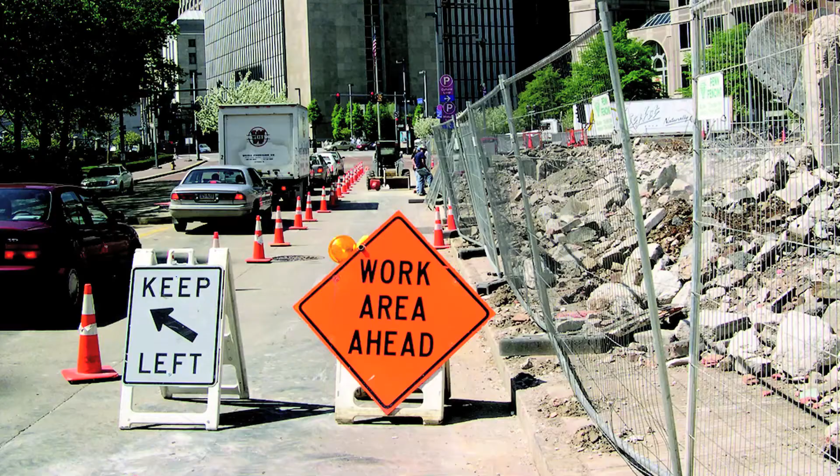Safety of the public includes pedestrians and vehicular traffic. Particular conditions on a job site may require additional signage, such as this one. Emergency egress plans are developed for each floor of every job site.

Every job site has an adequately supplied first aid kit, and some even have automated external defibrillators. Superintendents and foremen are all first aid CPR certified. Smoking is not permitted inside our buildings or job offices. All job sites have all applicable posters on display for everyone to reference.

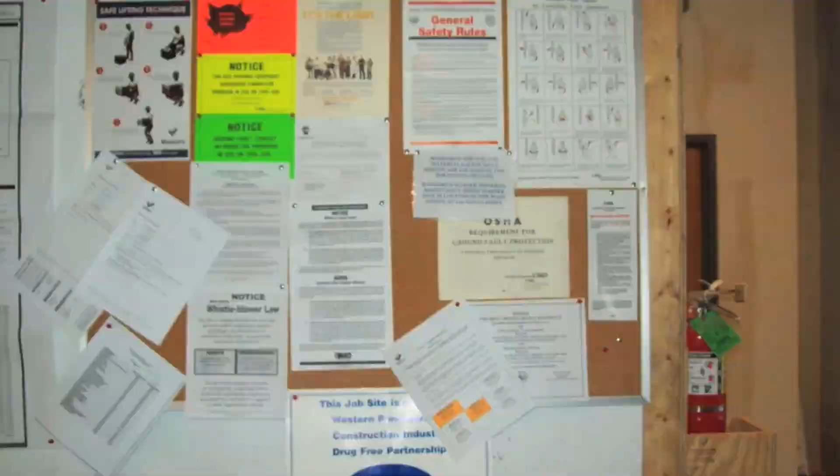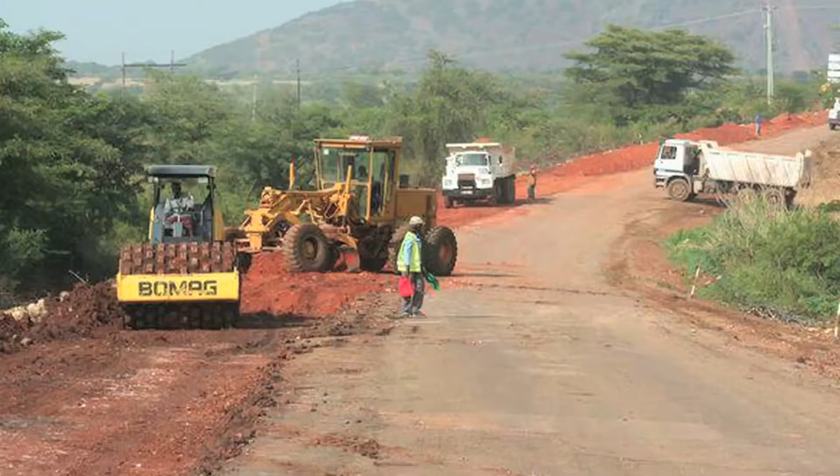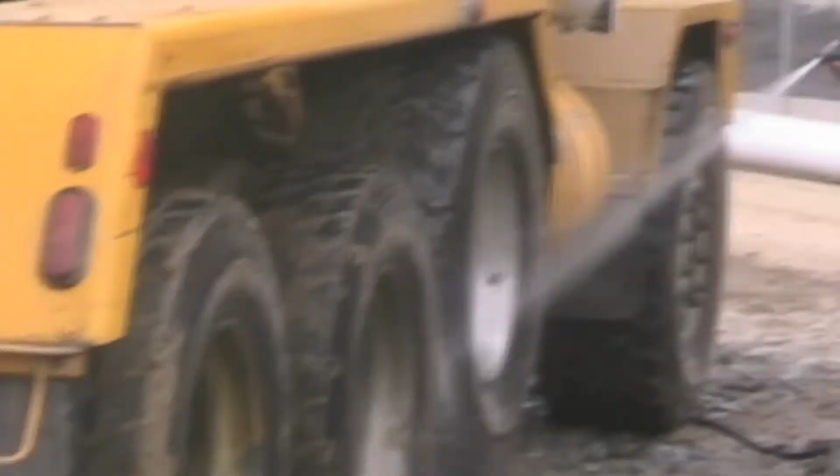Neither drugs nor alcohol are permitted on any job site. Job sites are laid out to allow for clear vehicle and equipment travel. Materials are neatly stacked and stored. Perimeters are adequately lit for the safety of pedestrians. Tire washing is vital in keeping public roads clean.

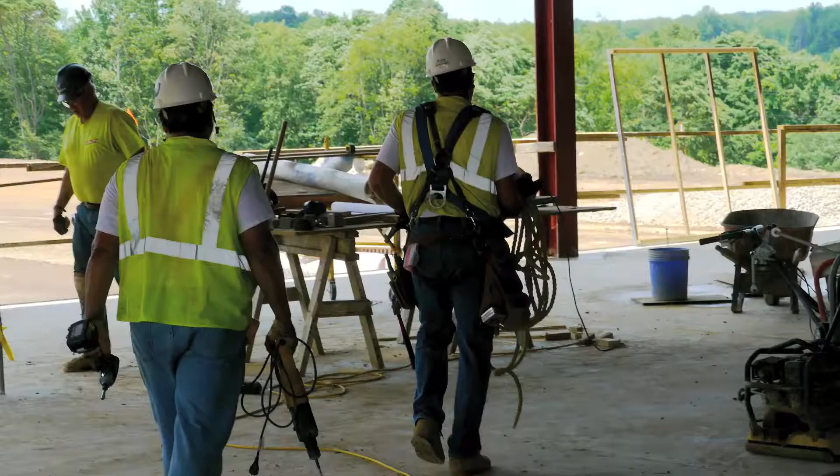Proper job site attire includes long pants, shirts with sleeves over the shoulders, work boots, and hard hats at a minimum. High visibility attire is recommended on all Mascaro job sites. High visibility attire is required on any job site where there is moving equipment, machinery, or vehicular traffic. Hearing protection is available on every job site.

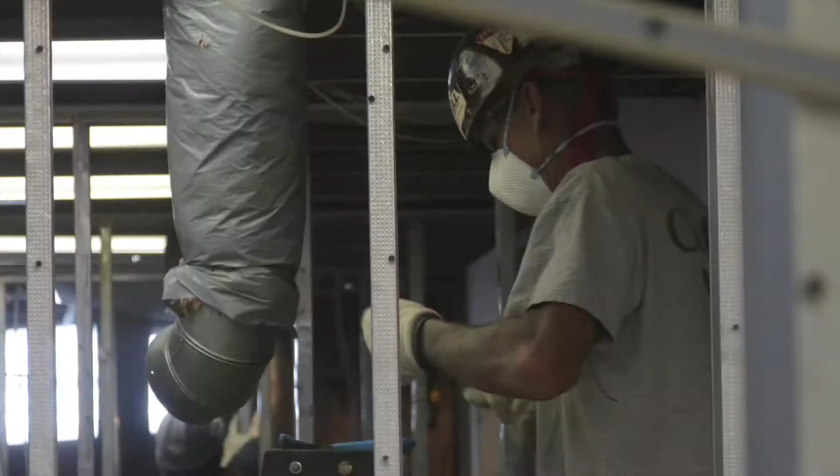Filtering face piece respirators like the N95 protect against nuisance dust and can be worn by anyone on a voluntary basis. Half-face respirators can only be worn by employees who have been fit tested and undergone a health evaluation. Respirators must be kept clean and carefully stored.

PA One Call must be called before any digging begins. All excavations must be inspected before anyone enters and barricaded. Excavations are accessed by an extension ladder. Every excavation 5 feet and greater must be benched, sloped, or shored with a trench box.

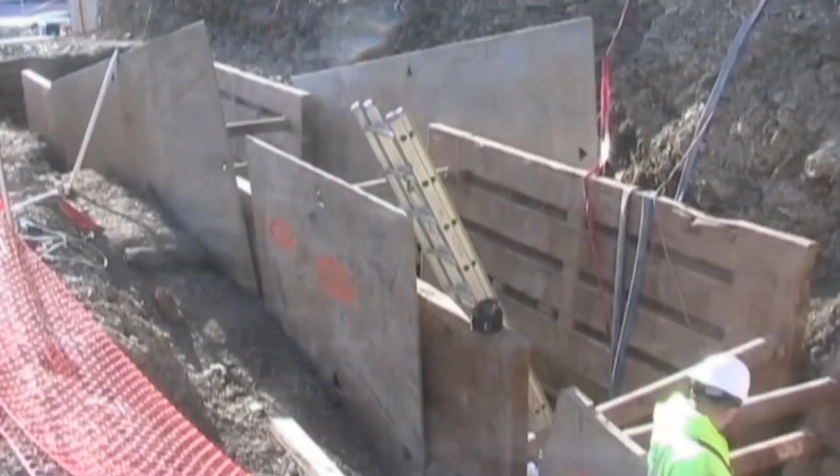Boxes must extend above the top of the excavation. Workers must always be inside the box. Spoil piles need to be 2 feet back from the edge, and equipment should never travel near the edge of an excavation. Ensure all utilities are marked.

Fall protection is very important. Anyone exposed to a fall 6 feet or greater will be protected. The body harness is the main piece of personal protective equipment used in fall protection. Every worker must inspect their harness before each use.

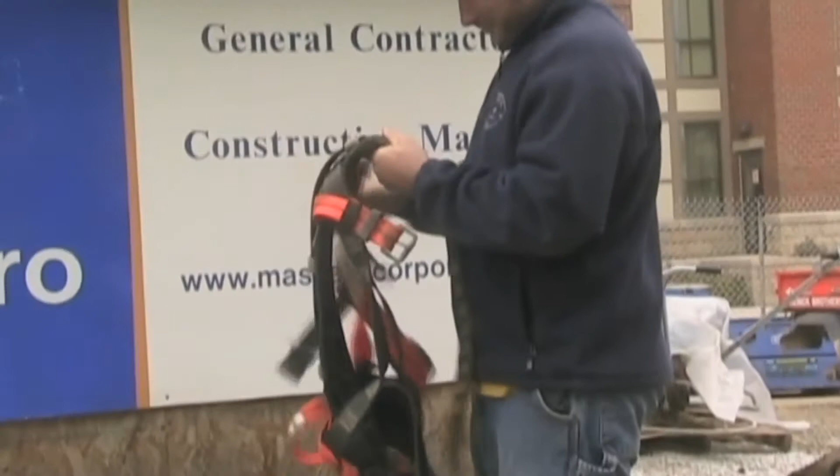Labels must be legible. There should be no tears, frays, discoloration, or alterations made to the harness. The harness must be worn properly. The D-ring is in the middle of the back, the chest strap in line across the chest, and leg straps should be snug. Any harness involved in a fall will be removed from service immediately. Ensure the harness is the right size and weight capacity for the worker and his or her tools.

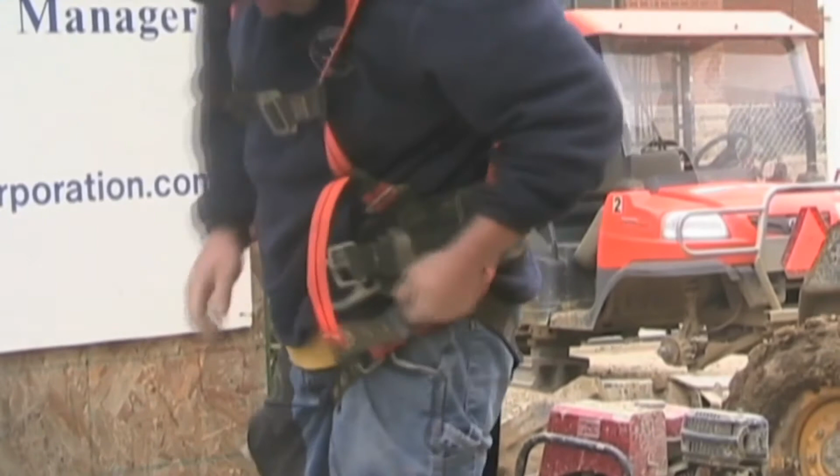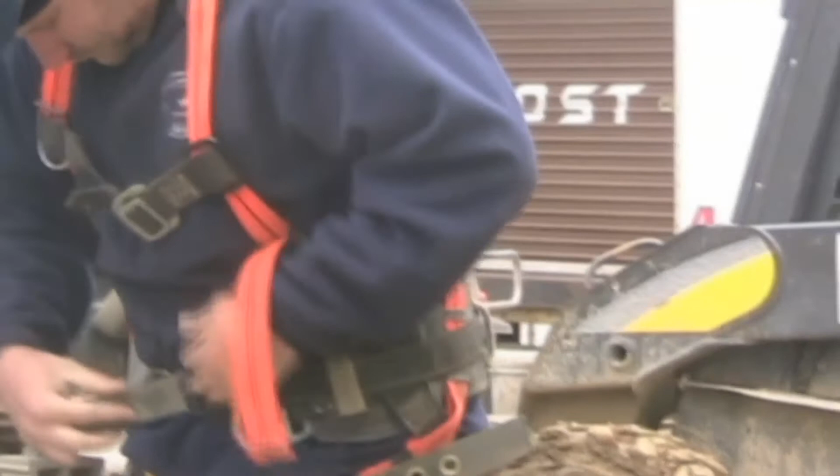Other components of personal fall protection should also be inspected thoroughly. These include lanyards, rope lifelines, and retractables. Ensure your anchorage point is adequate. Only one worker can be tied to an anchorage point at one time. Never use a retractable and a lanyard together at the same time. Also, ensure you are using the proper fall protection device for the height at which you are working.

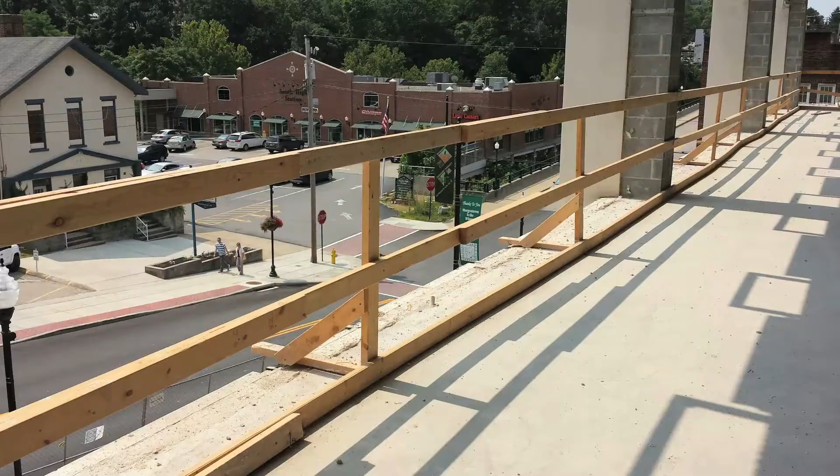Guardrails are a very common means of fall protection for leading edges, shaft openings, and window openings. Guardrails can be wood or cable. The top rail is to be at 42 inches and the mid rail at 21 inches, plus or minus 3 inches. Cable will be flagged to ensure visibility with stanchions 8 feet apart.

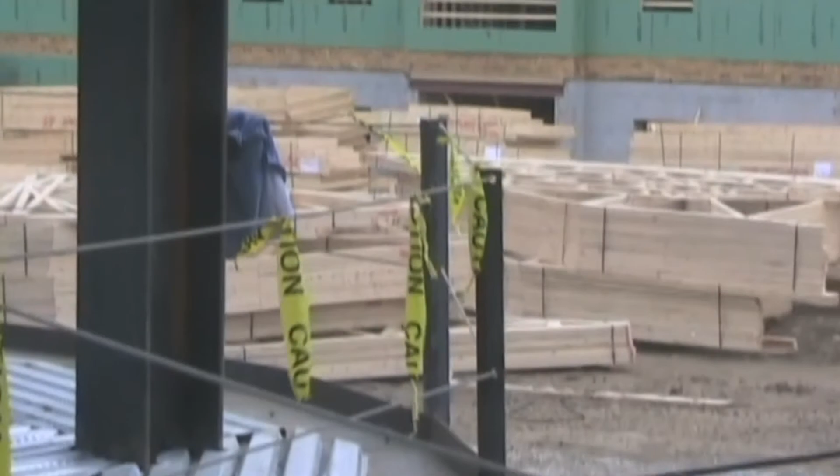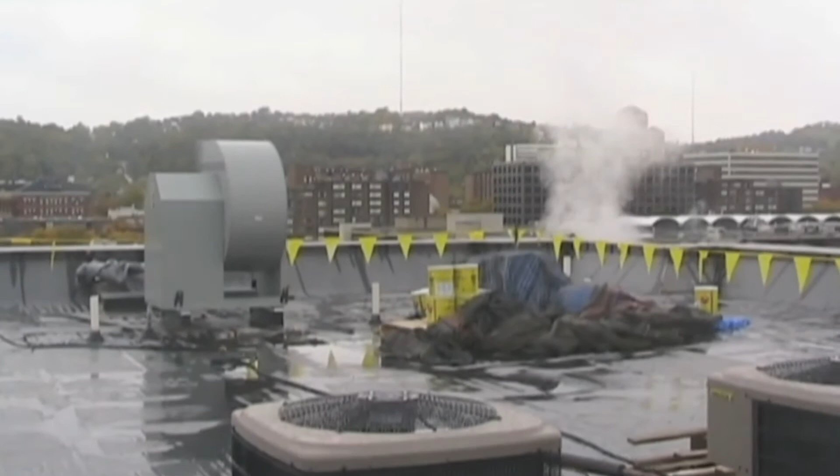When a roof parapet is below 39 inches, flagging will be used. Working beyond the flagging requires additional fall protection measures like a harness or safety monitor as a last resort. Fall protection shown here includes roof brackets, retractables, and rope lifelines.

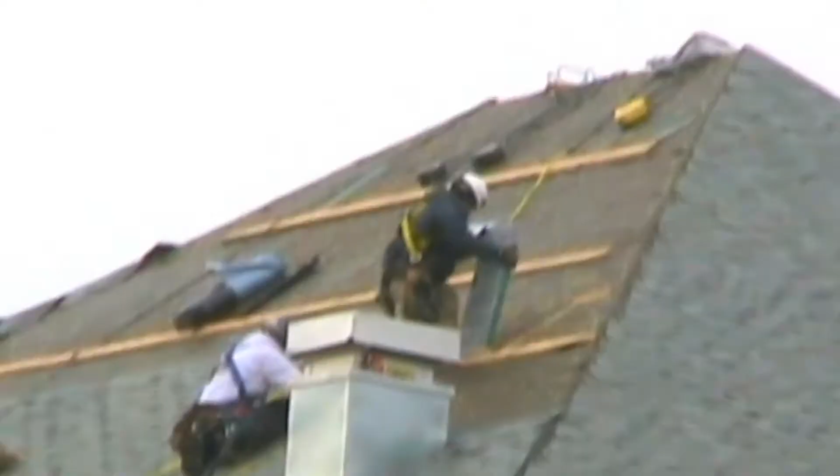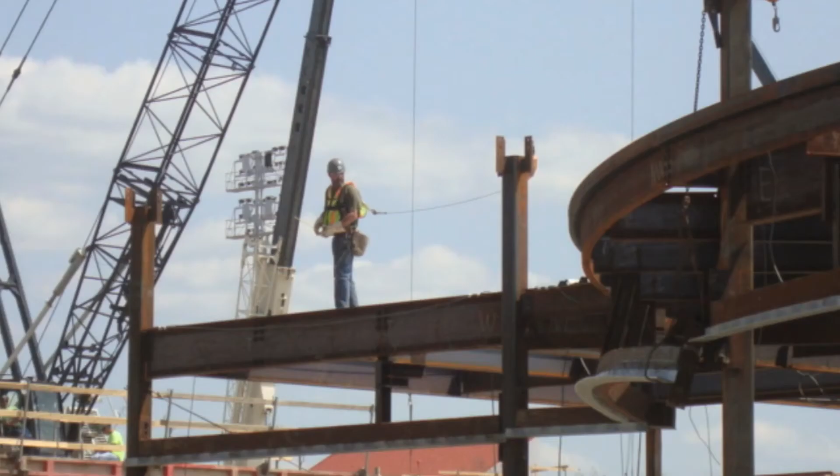It is important to have your anchorage point above your D-ring. If an overhead anchorage point is not available, it is acceptable to tie off below your D-ring. When using retractables, watch how far they are extended to avoid swinging in the event of a fall. Horizontal lifelines, like the one shown in this picture, must be engineered. When welding, employees will wear welding hoods and gloves.

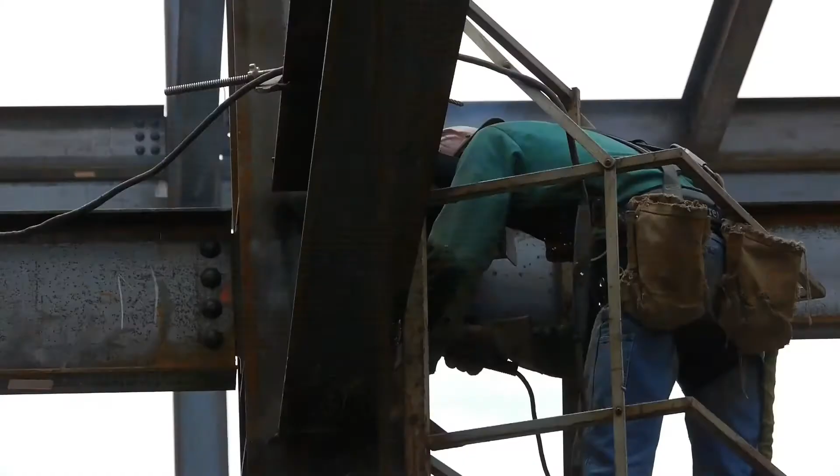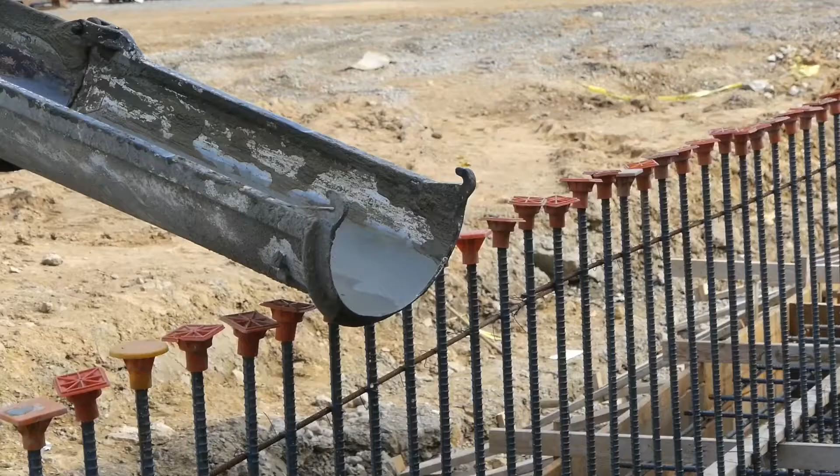Screens such as this are helpful to protect other employees from welding flash. When working with concrete, long sleeves and gloves are recommended. Rubber boots will be provided. A hand washing station is also available, and workers should use care to not get concrete on their skin. Always use caution when backing up trucks and ensure backup alarms are audible.

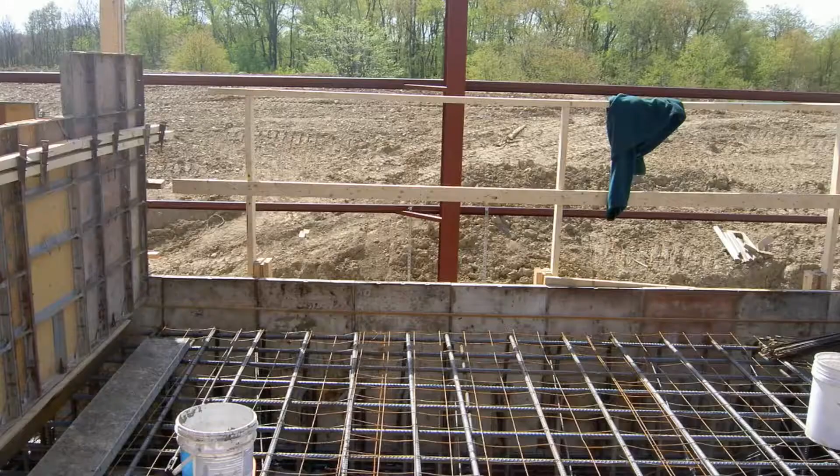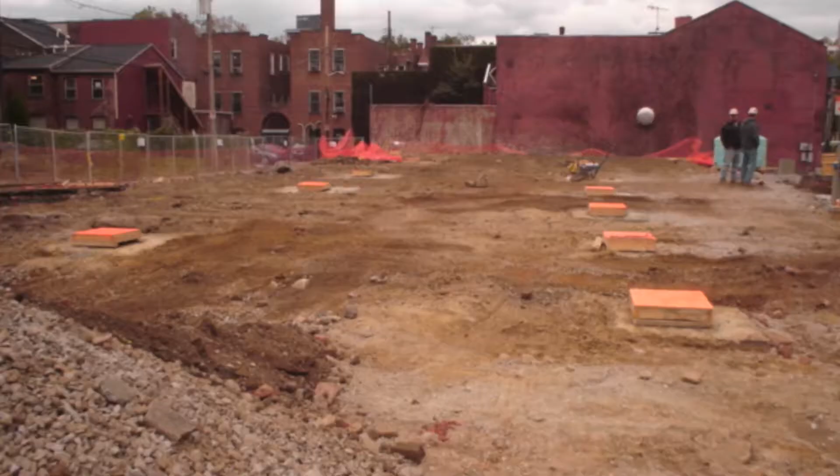Concrete pour perimeters are protected prior to the concrete pour, so fall protection is readily in place. Rebar is capped as shown in this picture to protect workers from possible impalement injury. Anchor bolts are also protected as shown in this picture.

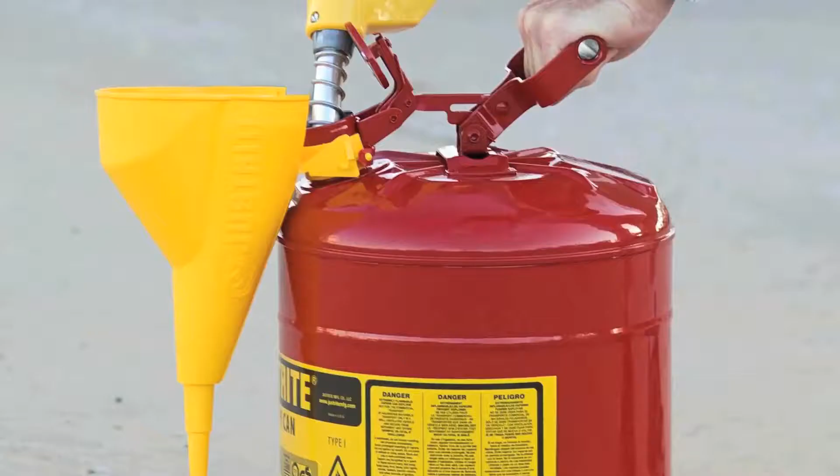Every job site has fully charged and currently inspected fire extinguishers. They can be mounted on the walls or visibly located in hallways or stairwells. All gas cans have self-closing safety lids. Gas is kept in red cans, diesel in yellow, and kerosene in blue.

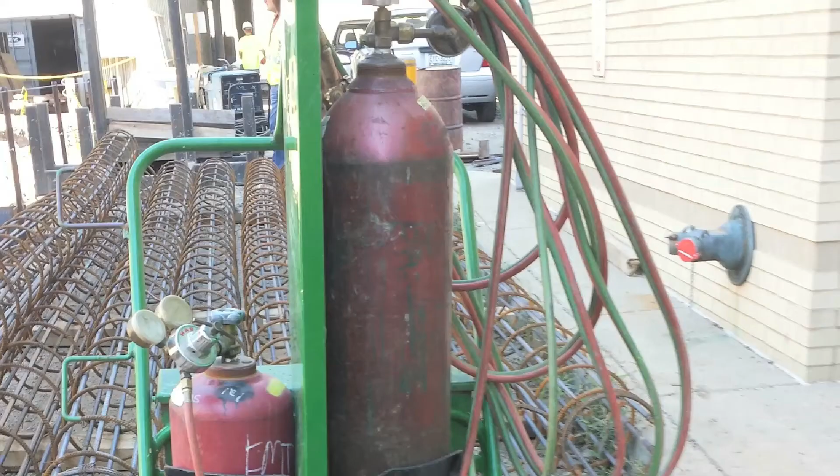All cylinders are kept in an upright position and secured at all times. Fire extinguishers are in close proximity. Cylinders must be capped when not in use. Oxygen and fuel gas cylinders must be separated by 20 feet or by a 5-foot-high, half-hour rated divider. All cylinders in use must have properly working gauges with the covers in place.

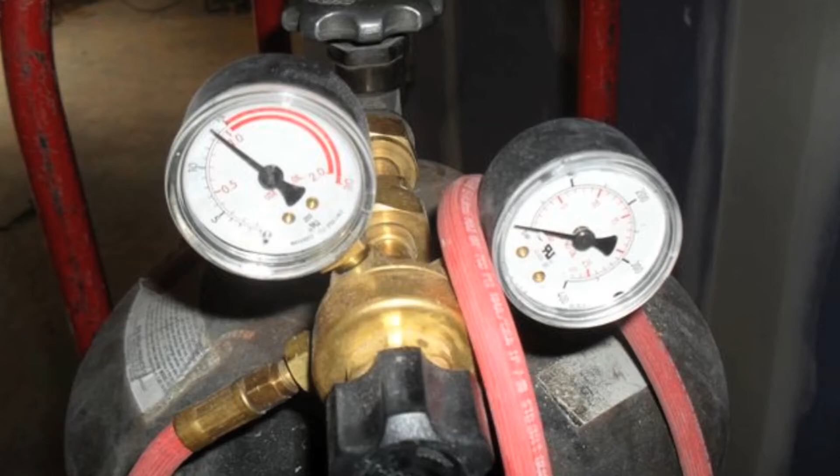Fuel tanks are properly labeled and kept in containment pans to protect against damage and contain any leaks or spills. A charged, currently labeled fire extinguisher must be between 25 and 75 feet of all fuel tanks.

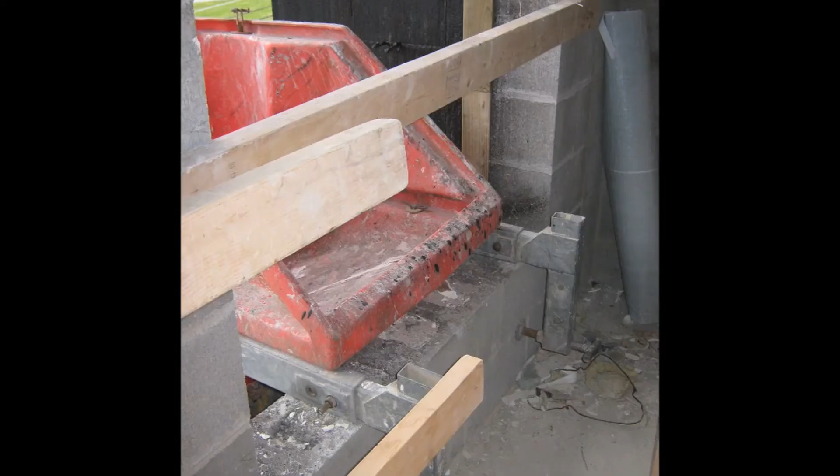When performing demolition, the area is always barricaded and water is used to control the dust. Ensure equipment is in good operating condition and all employees are in sight of the operator. Trash chutes are found on multi-story buildings. The openings are always barricaded.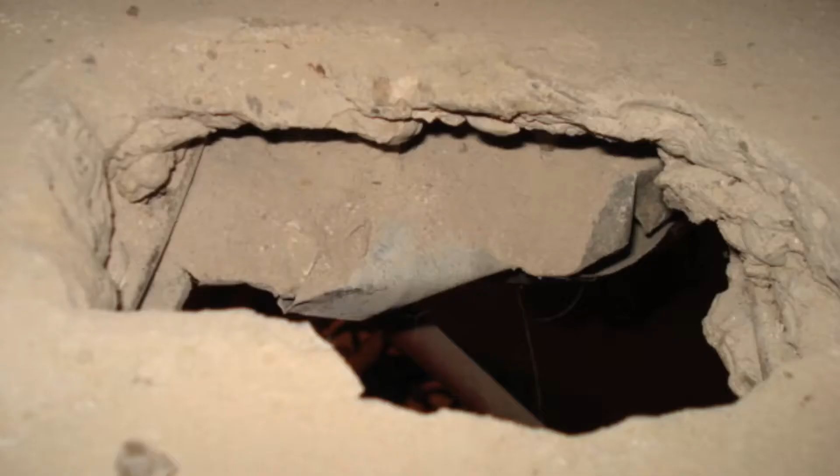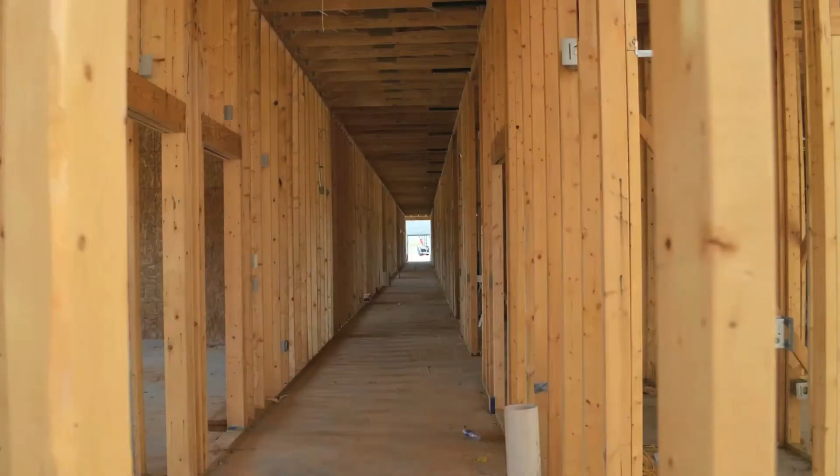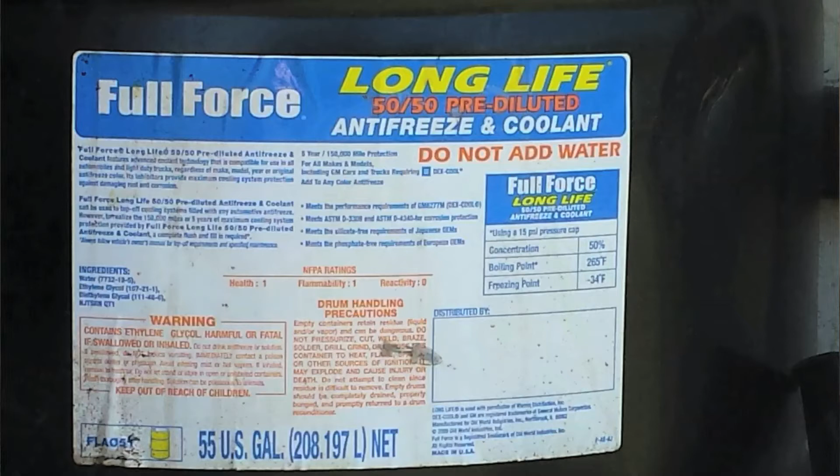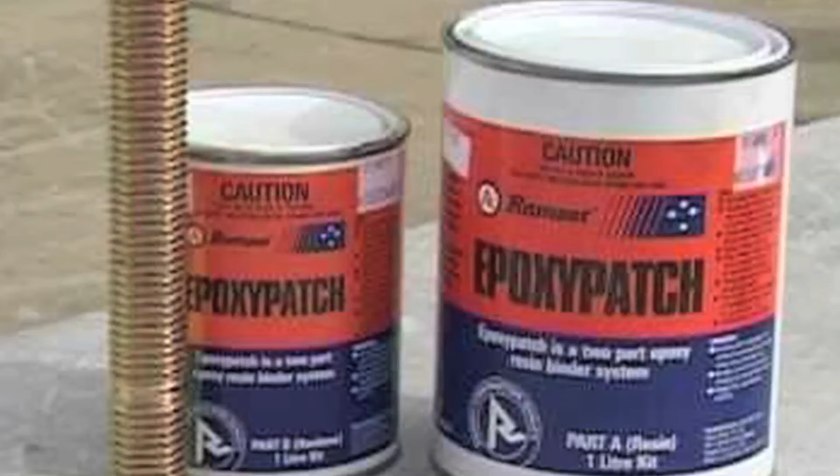All products and materials are properly labeled, and the label must be legible. Each job site contains a chemical inventory sheet and the proper material safety data sheets for every chemical on the job site. Material safety data sheets describe the material and all associated health hazards and PPE that may be needed to work with the material.

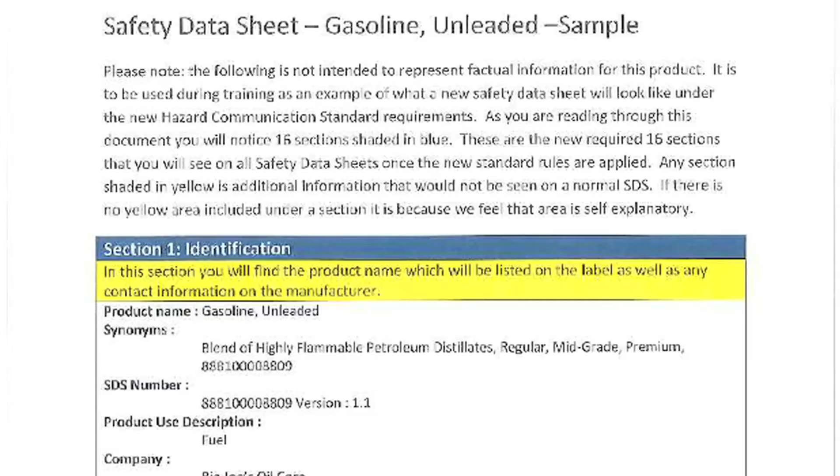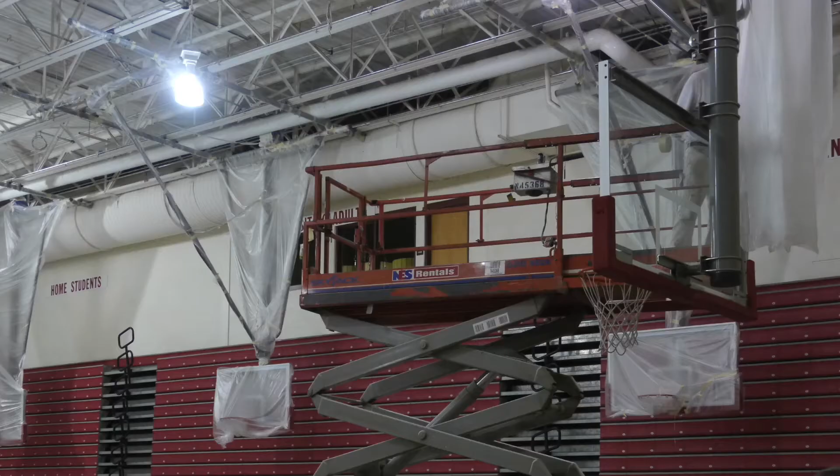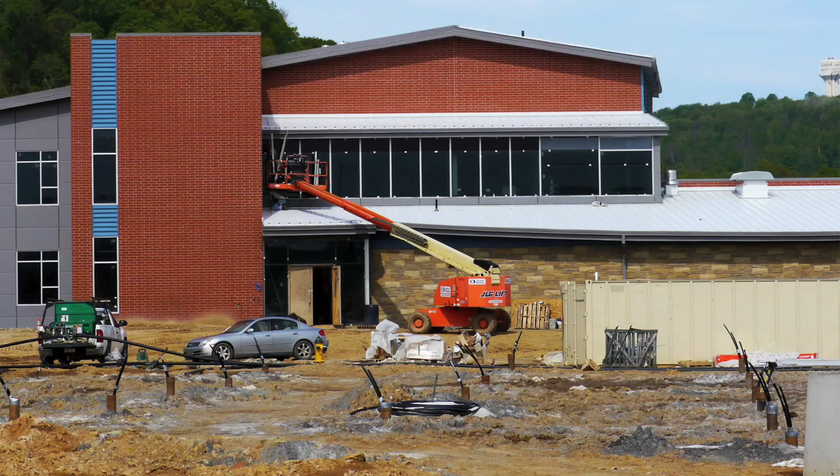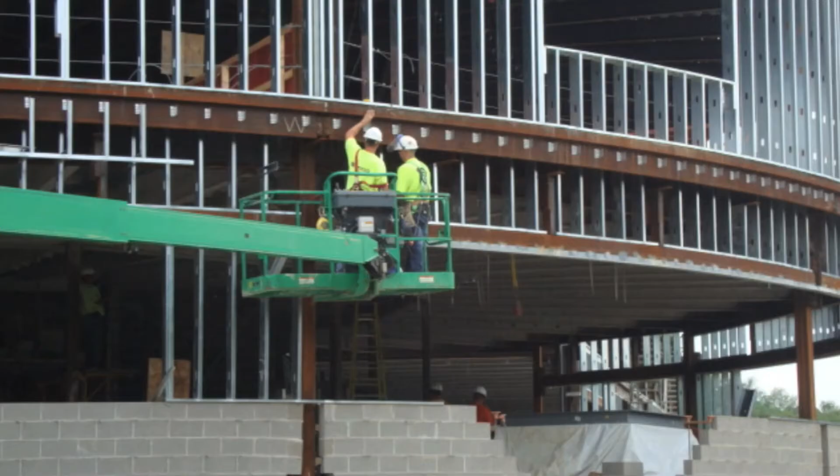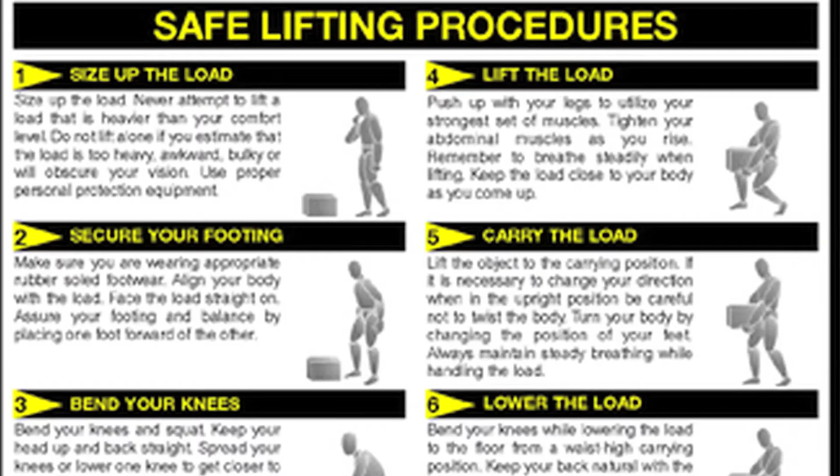Another type of lift found on our job sites is a swing arm lift, as shown here. Workers must also stand on the deck of the lift. Guardrails must be in place. In addition, the worker must also be tied off to the inside of the basket at all times. Safe lifting is encouraged on every job site to ensure the health of each worker. Wheelbarrows and carts are available on all job sites to move materials.

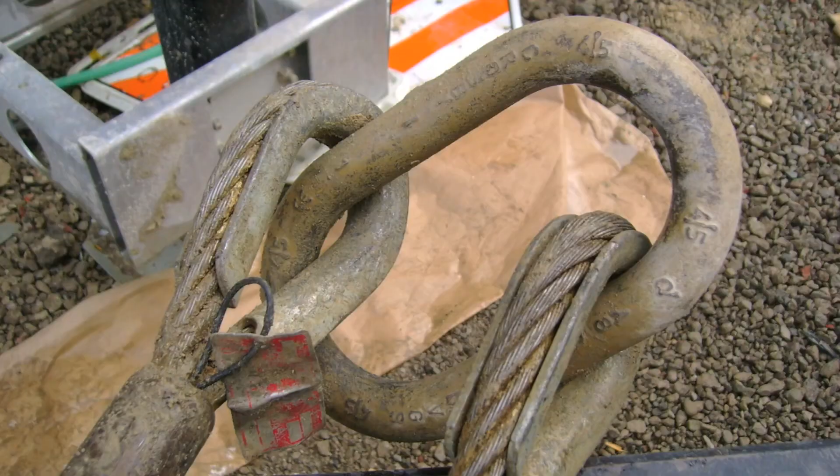Slings are commonly used for hoisting material. If a sling is frayed, torn, discolored, or damaged in any way, it must be removed from service. A key indicator of damage is when the colored thread is showing. Wire chokers must have tags. Ensure the wire is not bird caged and there aren't a number of broken strands of wire in the choker. Also ensure that every sling or choker is the proper weight capacity for the material being hoisted.

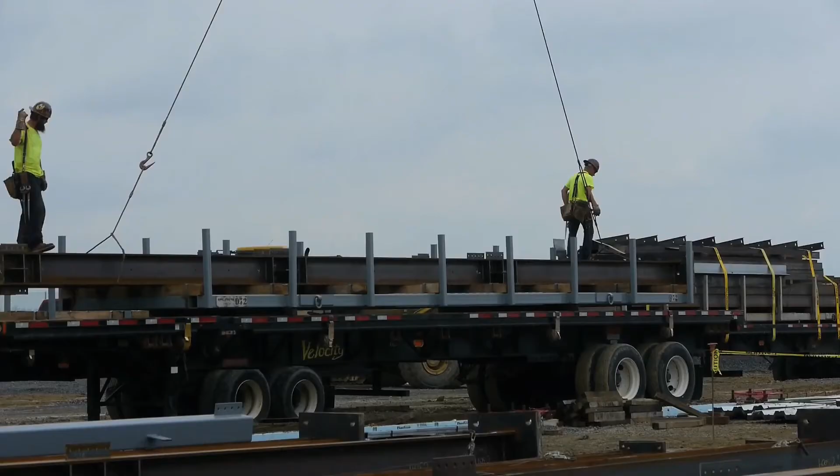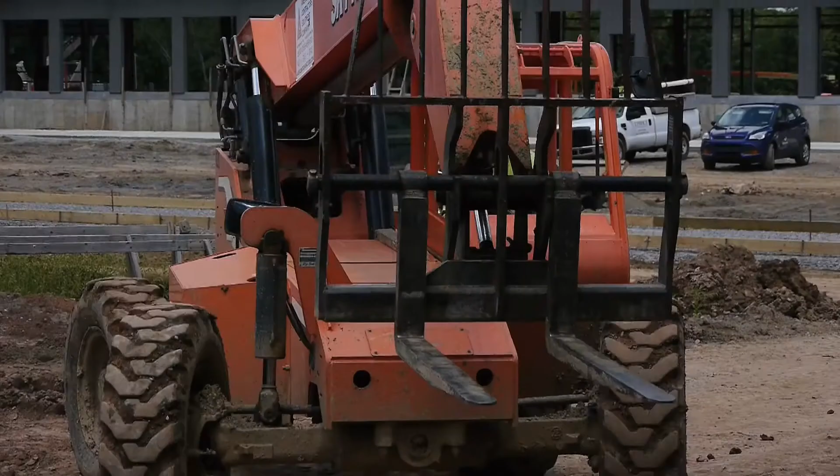Crosby clamps must be properly applied with the belly of the clamp on the live end of the rope. When maneuvering bulky loads, more than one employee should assist and taglines should be used. When hoisting more than one item at a time, ensure they are properly rigged. An all-terrain forklift is commonly used for material handling. The operator must be certified and wear their seatbelt at all times. The backup alarm must be audible.

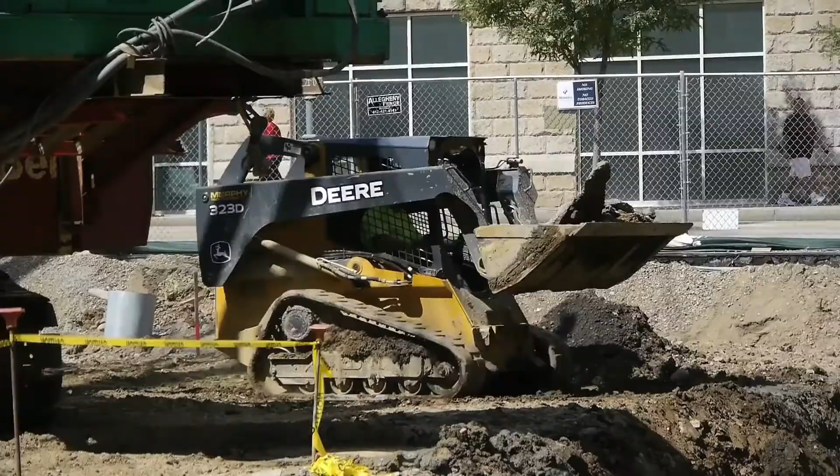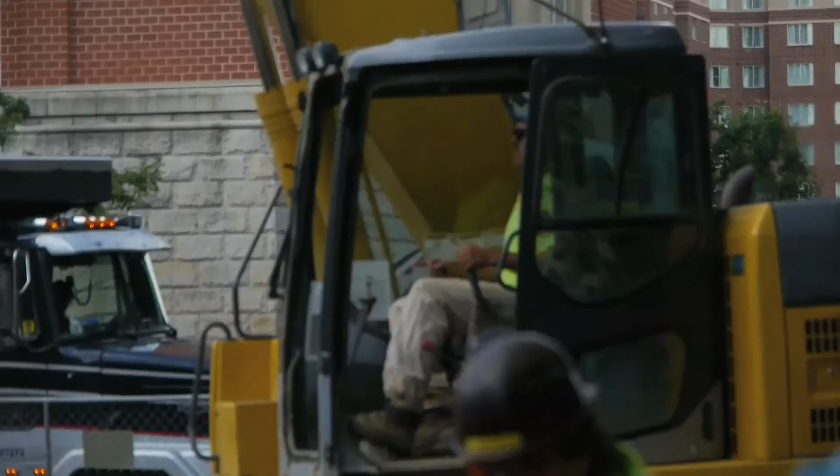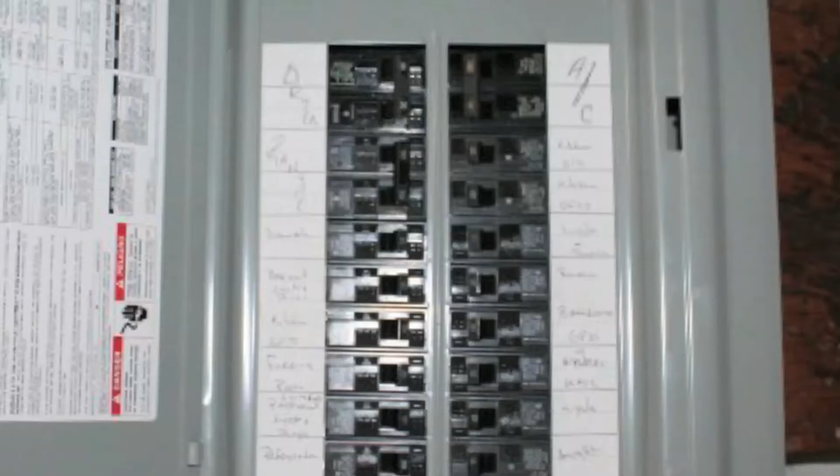All heavy equipment must be in good operating condition. This includes not leaking any fluids, having an audible backup alarm, windshields free from cracks, and competent operators. Electricity is provided and maintained by the electrical contractor on the job site. All panel boxes must be securely closed and have no openings anywhere on the box. All boxes must be properly labeled. Inside of the panel boxes, there must not be any openings either. If there are, blanks are to be used.

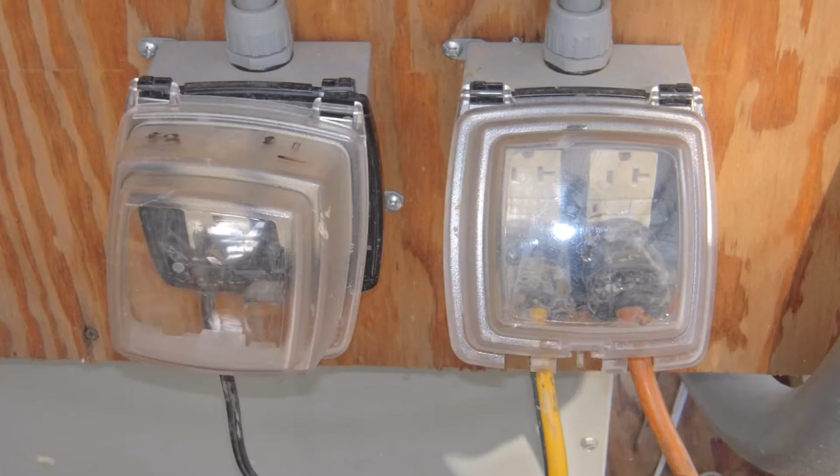Job site outlets are to have ground fault protection, as you can see here with the test reset button. Outdoor outlets must have covers on, as shown here, to protect from the weather. All extension cords must have a ground prong. If the job site is not wired with ground fault protection, a GFCI as shown here must be used. With permanent power, all outlets must have faceplates, then the GFCI, then the cord or tool.

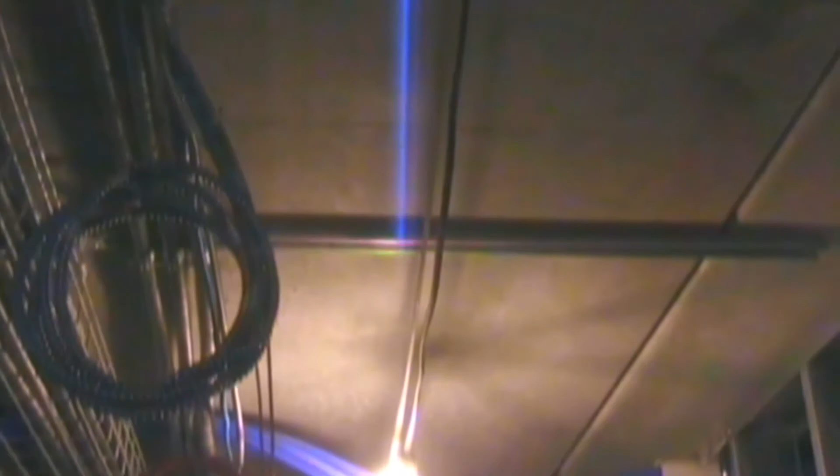Temporary lighting will be wired overhead as shown here by the electrician on the job site. All temporary bulbs will have cages to protect them from damage. Keep extension cords up off the ground to protect them from damage. Temporary light stands must also have protection in place to keep the bulb from being damaged.

It is very important to be aware of any overhead power lines near your job site. Make sure they are located, signage is in place, and always take them into consideration with heavy equipment, scaffolding, and even with the use of ladders.

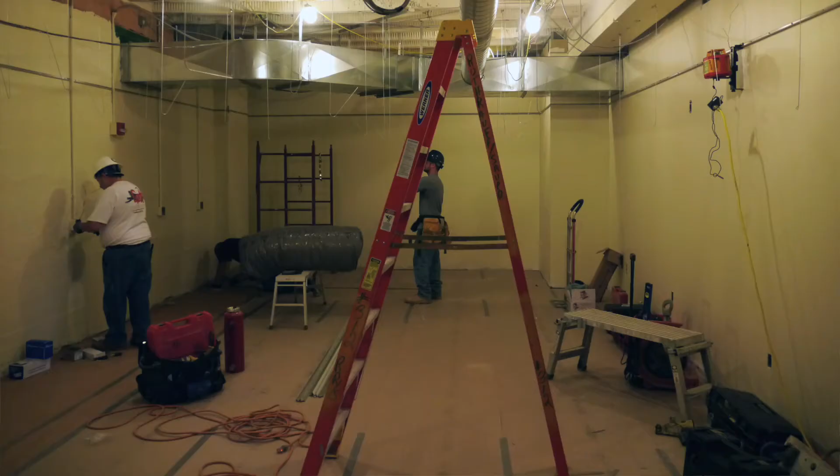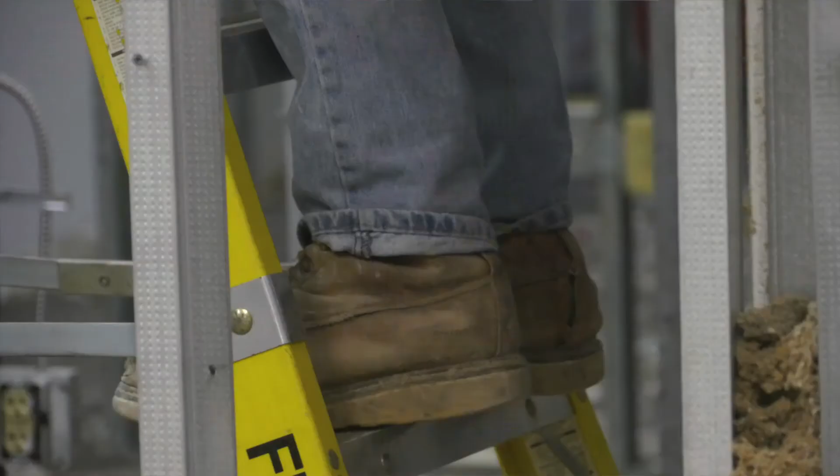Step ladders are to be used in the fully open position and on a level surface. Do not paint or alter the step ladder in any way. Never stand on the top or next to top step of a step ladder.

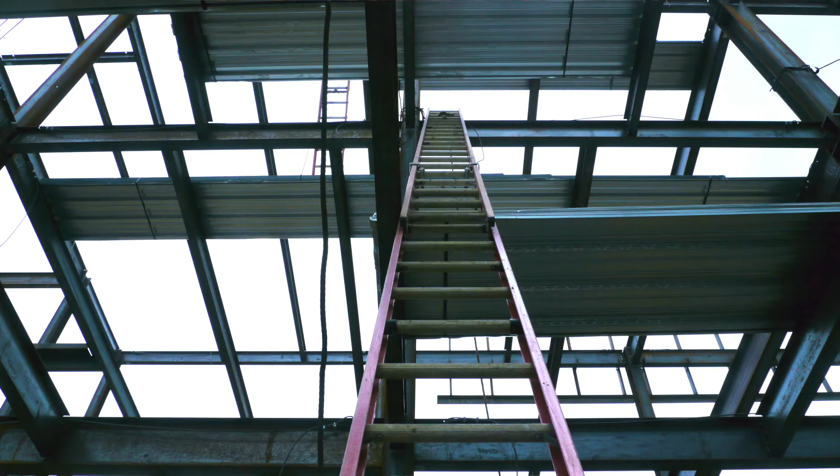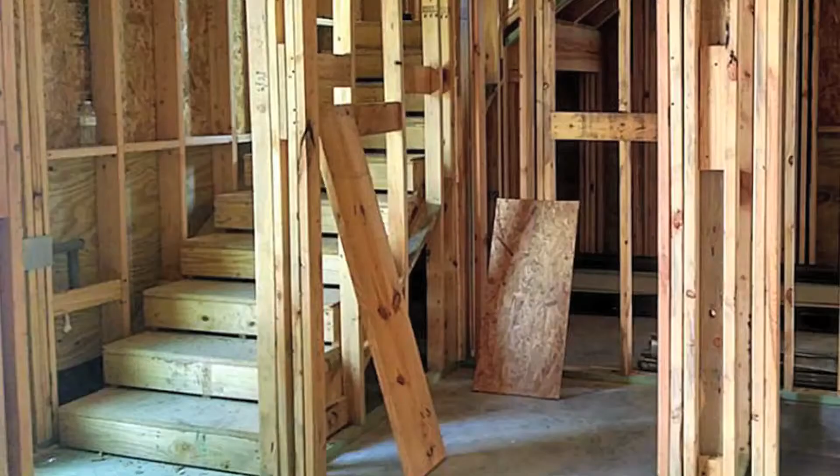Job-built extension ladders are very common on our sites. Notice the cleat at the bottom to keep the ladder from kicking out. Extension ladders must extend 3 feet beyond the platform and be secured at the top. Job site stairwells are kept clean and have handrails in place. Any break in elevation over 19 inches must have a ramp, steps, or ladders for access.

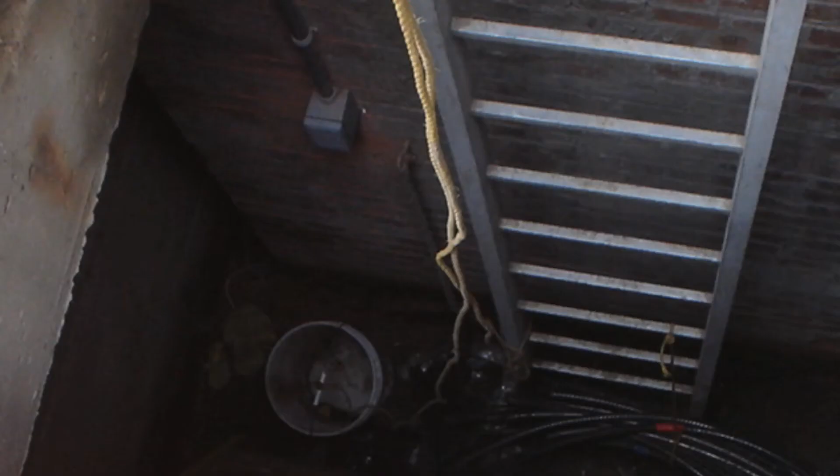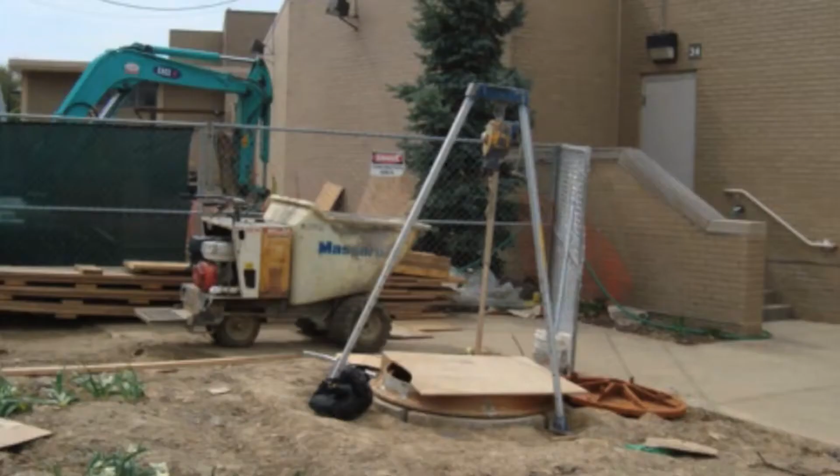A confined space is defined as having limited means for entry and exit, not designed for continuous occupancy, and poses the possibility for asphyxiation or entrapment. Before every entry into a confined space, the air is monitored as shown here. The confined space is properly covered when no one is working inside.

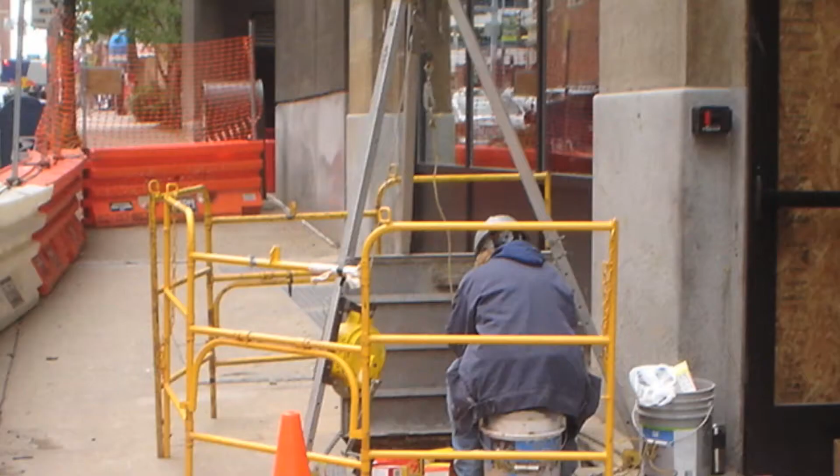A tripod is used for each worker in a confined space. The tripod is attached to the worker's harness and is required in case retrieval is necessary. A spotter is always outside the space when someone is inside. Notice the barricade around the confined space.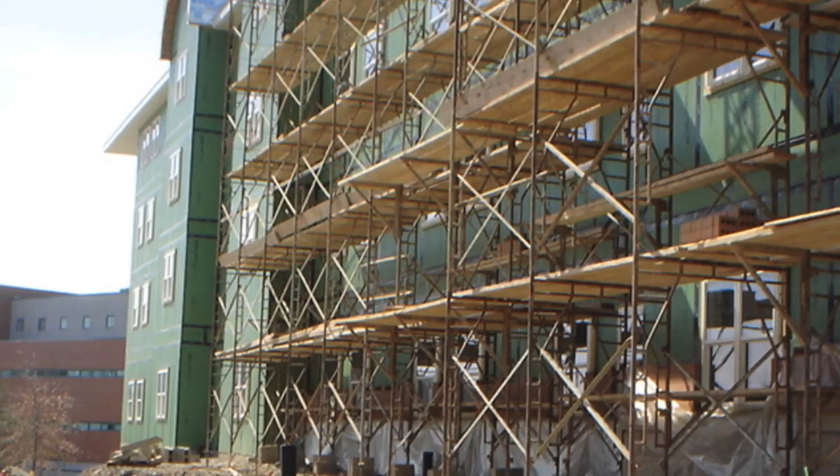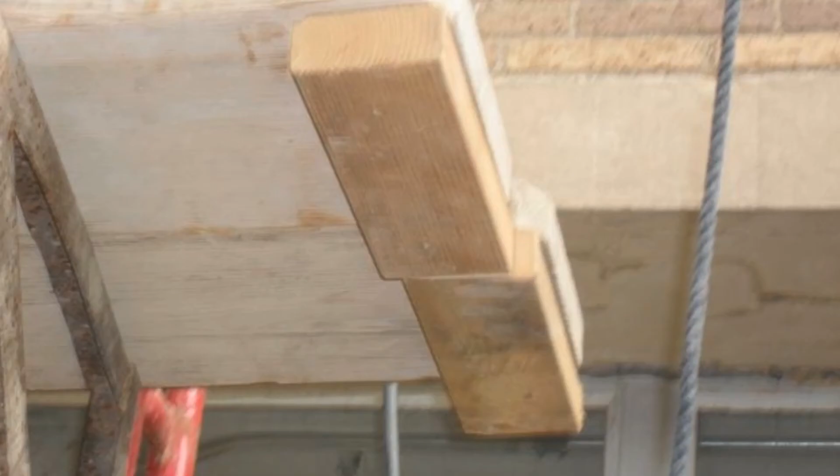Scaffolding is commonly used as an elevated work platform. Only competent scaffold erectors with a card can build and dismantle scaffold. Scaffold must be set up on a firm, solid surface. It is completely planked and railed with toe boards in the areas the workers are working. Multi-levels will have a stair tower. If scaffold planks do not extend far enough beyond the frame, cleats are used to prevent the plank from walking off the frame.

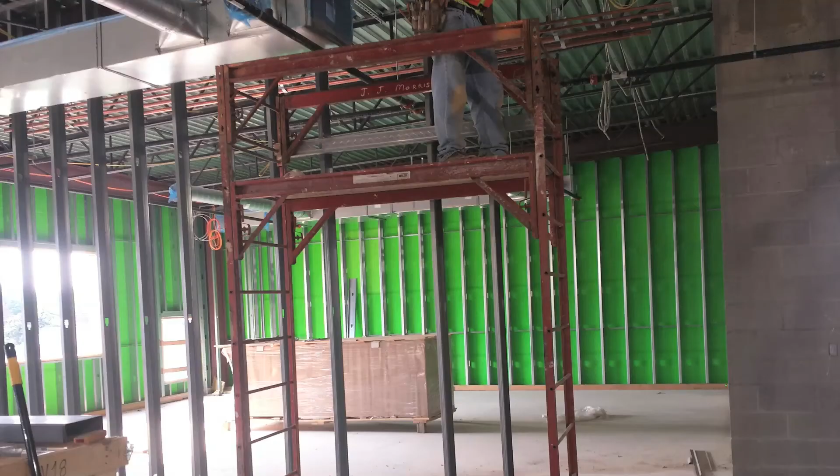Another form of scaffolding is a mobile scaffold as shown here. Mobile scaffolds must be used on a level surface with the wheels locked when people are on the scaffold. The work platform must be in good condition and solid. All scaffold over 6 feet needs rails for fall protection. Do not pull yourself along while standing on the mobile scaffold.

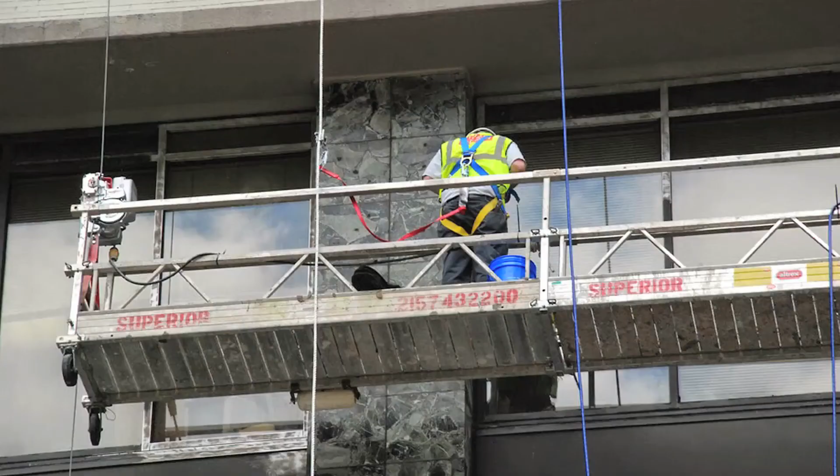When working on a suspension scaffold, the workers must be tied off at all times. Ensure the individual lifeline anchorage points are separate from the tiebacks of the scaffold itself.

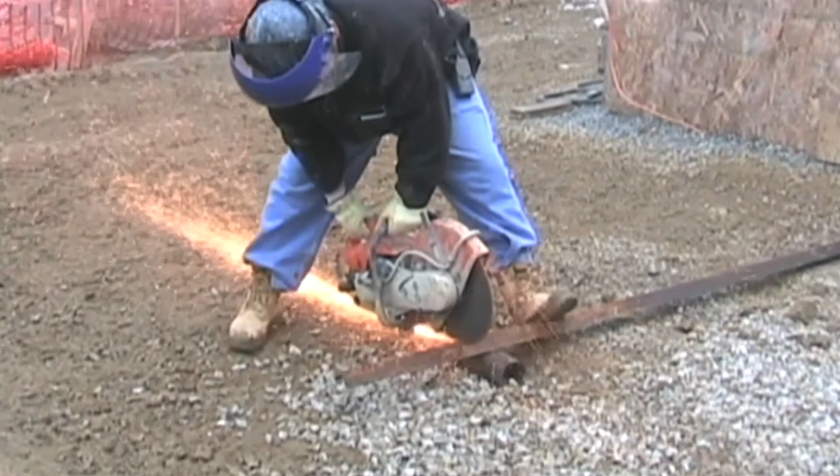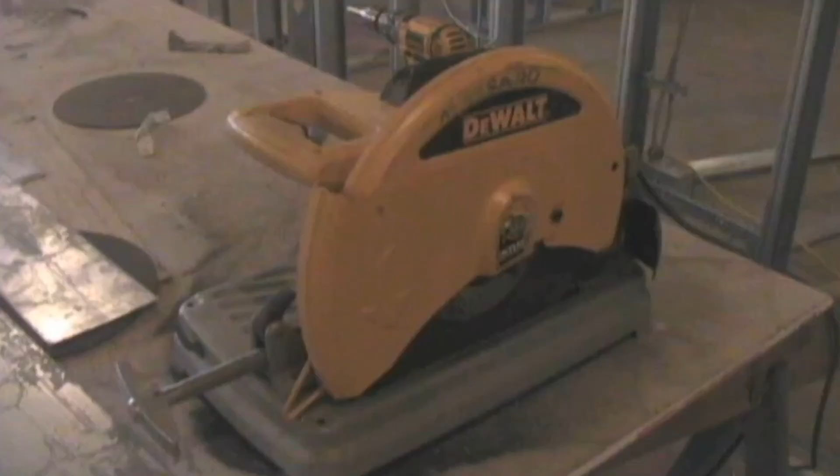Power tools are commonly used on all of our job sites. Before working with a power tool, ensure you have the proper personal protective equipment, such as gloves, face shields, and safety glasses. Before using the tool, make sure that any guards required are in place, the cords are not torn or frayed, and the tool is operating properly. Make sure you have the proper blade for the tool you are using. All power tools arrive at our job sites with the proper guards in place.

Hand tools also need to be inspected to ensure they are in good condition. This includes having a solid handle and the ends secured.

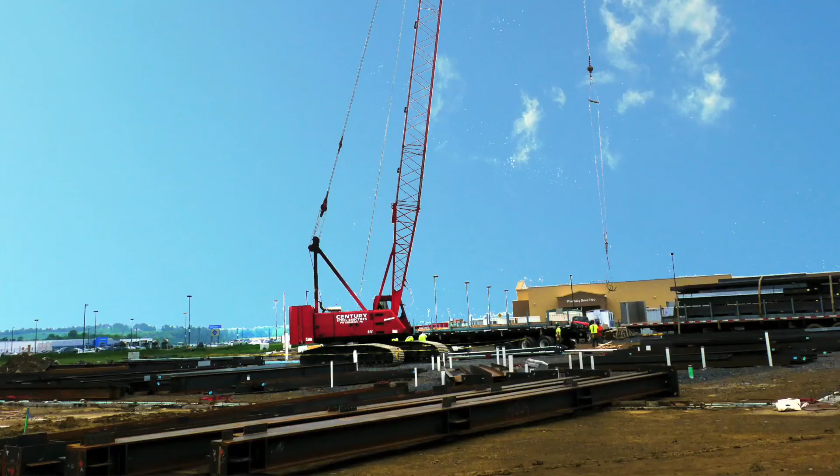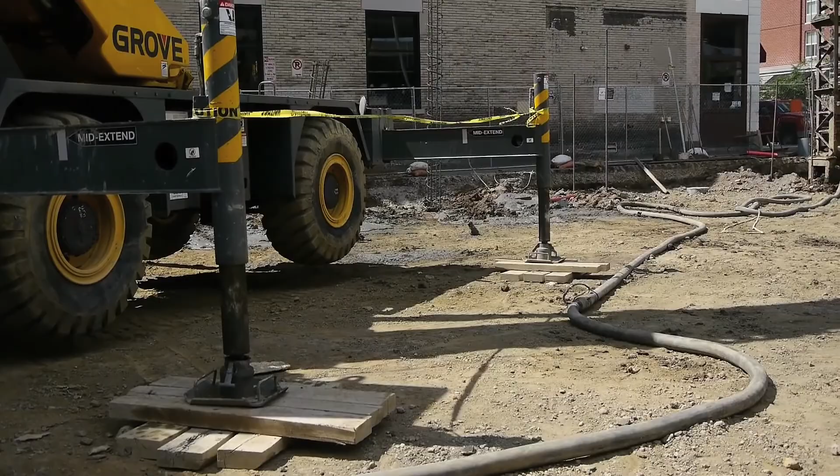The biggest piece of equipment on our job sites is a crane. The swing radius of the cranes is barricaded at all times. Cranes are set up on adequate cribbing or matting to ensure the surface on which they are operating is stable and level. When the outriggers are used, they must be fully extended and on a level surface. Before every lift, the operator must signal to the workers by blowing the crane's horn.

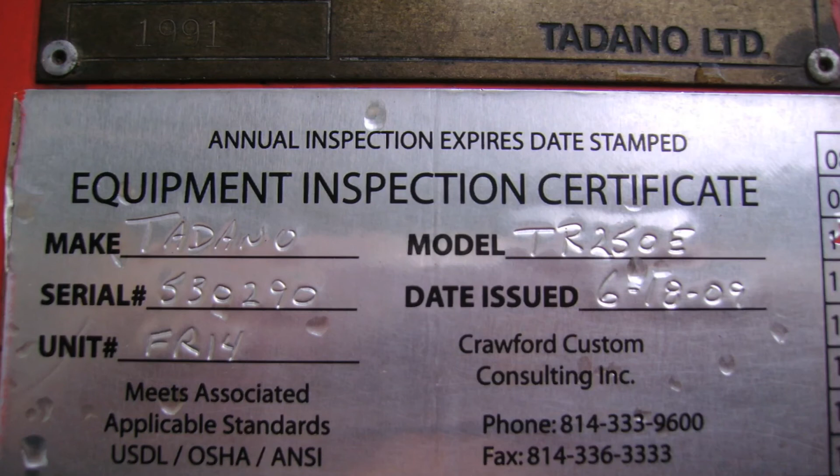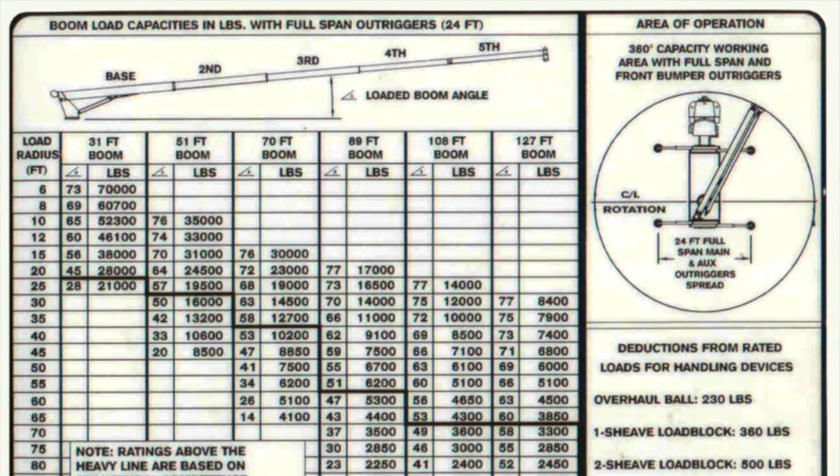All cranes will have a current annual inspection tag inside the crane cab. All operators must be certified as well. Crane cabs also are to have the appropriate load charts for that particular crane model. Workers who are signaling the crane operator must use the standard hand crane signals.

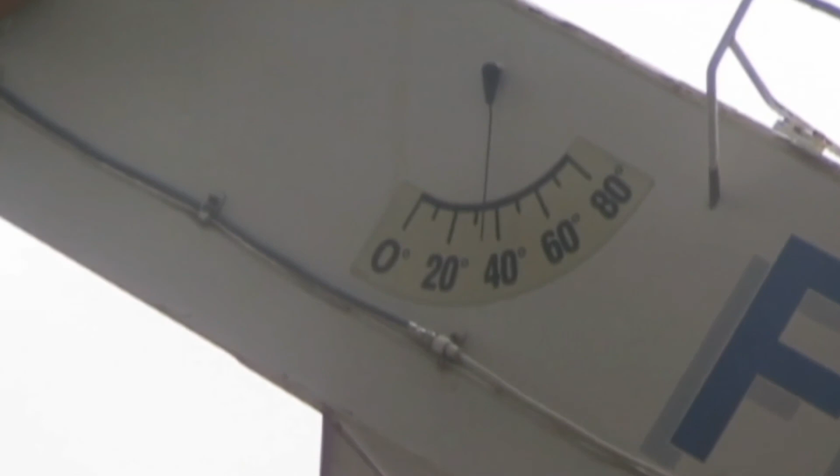Ensure the cable is spooled properly on the crane as shown here on the right spool. The load angle indicator must function properly. Anti-two-block devices must be on all cranes to prevent a load from being hoisted up and over the boom. All hooks must have safety latches.

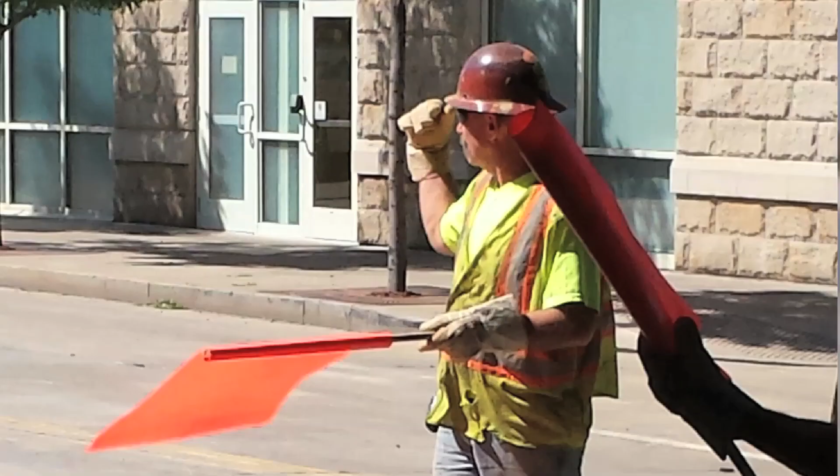Directing delivery trucks in and out of our job sites happens frequently. Before entering the streets, ensure you have on a reflective vest and have a flag with which to direct the traffic. The delivery trucks also must have an audible backup alarm.

From working on our job sites, to participating in company events, to your life at home, Massaro wants you to always put your safety, the safety of your family, and the safety of your coworkers above all.